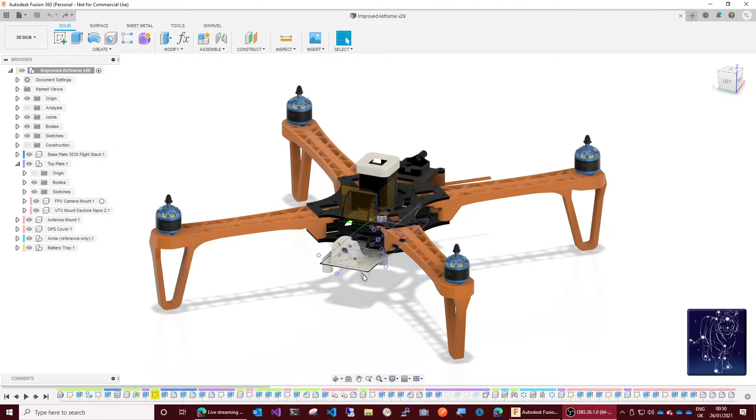I put out a video earlier today showing a test flight of the quadcopter, and one of the problems I had was that the battery tray, which is this part here in the drawing, let's zoom in here, and the bottom tray, this white part, is attached to the rest of the frame. Now you can see here there's no attachment.

That's because it uses little plasticky, spongy vibration dampening balls to sort of hang it, to suspend it in a way in which it's slightly springy. Those are made of a silicone rubber type of substance, and they go in these large holes, with a counter bore.

You just kind of squeeze them through and they hang on, and then there's a hole through the middle, and a plastic pin that goes through, called an anti-drop pin. The pin has a sort of barb on the end, and there's a little washer clip thing that goes over that and it's supposed to not come off. So the idea is that if your drone gets jostled, it can't pull the grommets out and drop the battery and anything attached to the battery tray.

Now, I found that to be not a very good design. I don't know if it's just the way I'm doing it, but I found that those pins let go all too easily, and I would rather at this point just put screws in, have the thing solidly mounted, and be confident it's not going to fall off in flight.

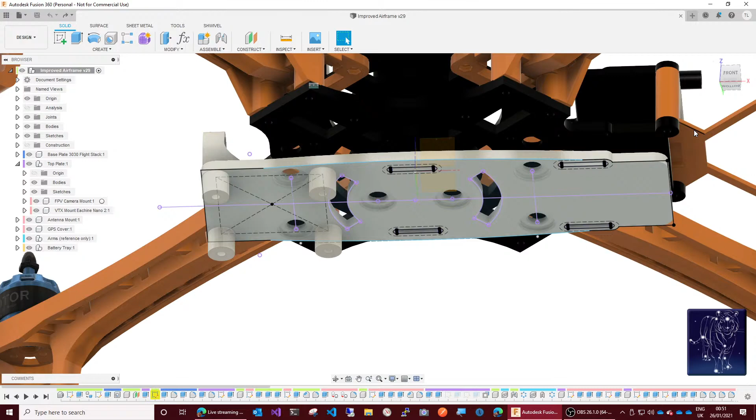So what I plan to do is develop some cylinders that fit in these recesses instead of the vibration dampening grommets, and join everything together rigidly. Okay, so how do we get started?

Now I'm only going to join the 4 corner holes. I'm not going to join these because these are directly underneath the flight controller electronics, bolts here in these 4 little holes. I don't want there to be any possibility of the drone landing heavily and pushing a screw right up through the flight controller and breaking the electronics, so that would be bad.

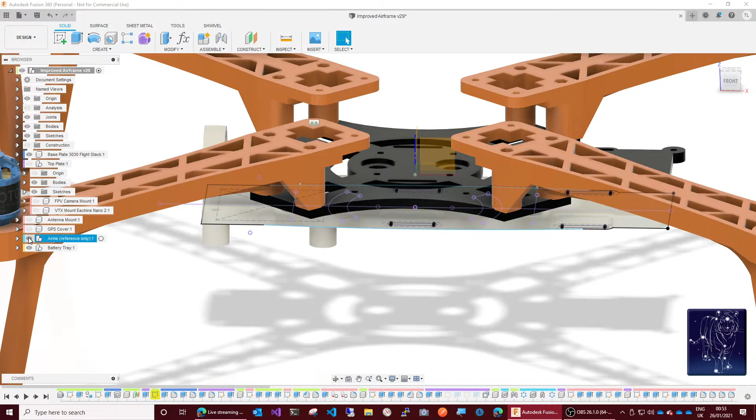So the primary footprint for this design is taken from the base plate here. I'm going to turn off the components I don't need - we don't need to see the top plate, we don't actually need to see the base plate really, but we'll come back to that. We don't need the camera mount, the VTX mount, the antenna mount, the GPS cover, the arms, or the battery tray for the time being.

So here is our base plate, and I actually want to disable the solid bodies there and just look at the sketch. Why am I not seeing the sketch? I think that's because that's up here. Yeah, footprint, there we go.

Okay, so this is the main sketch that drives all the dimensions, and one of the things we've got here is construction lines where these vibration dampening grommets go. So what I'm going to do - okay, so from this sketch, let's just turn the body back on, the top plate on.

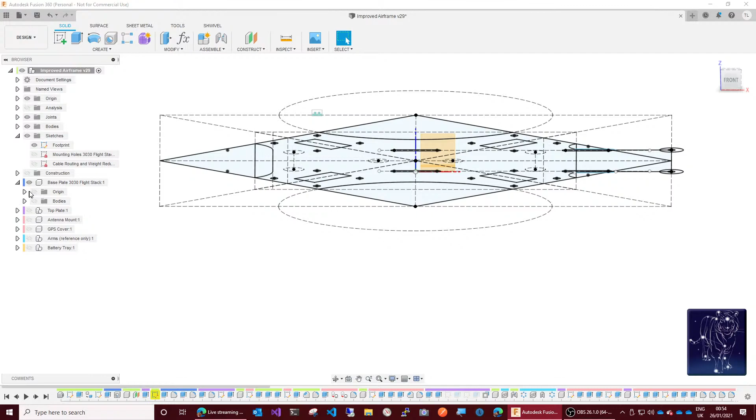Okay, now the sketch is on the, not the top plate, the base plate. Not the top plate, the base plate body's on. Okay, now as you can see, the sketch is on the top. I don't know if that's clear, but the sketch is on the top surface of the base plate. So let's turn the base plate off again.

There we go. So what we can actually do is just begin extruding from this sketch, I think. Okay, so let's try it and see what happens. It's Q for press pull. And... we can't.

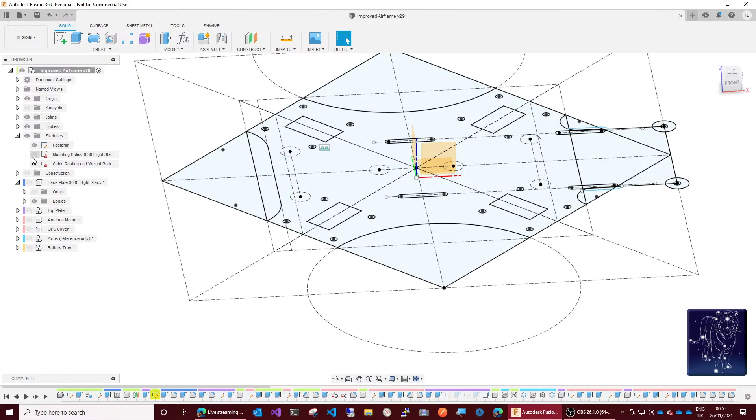Okay, let's stop this and let's go to the battery tray. And let's look at the... right, we are seeing the sketch for the battery tray. And that's on the base. All right.

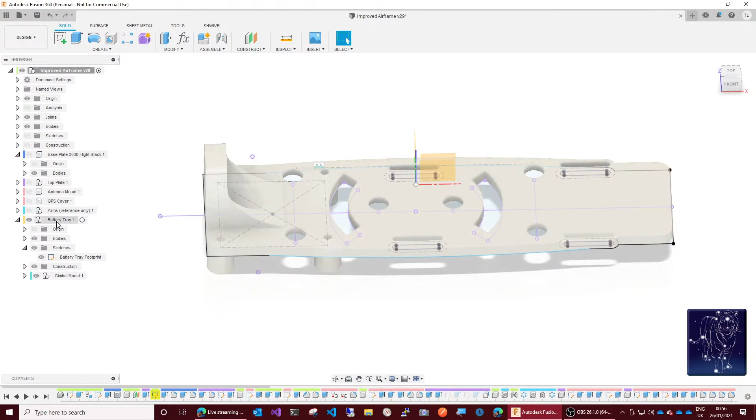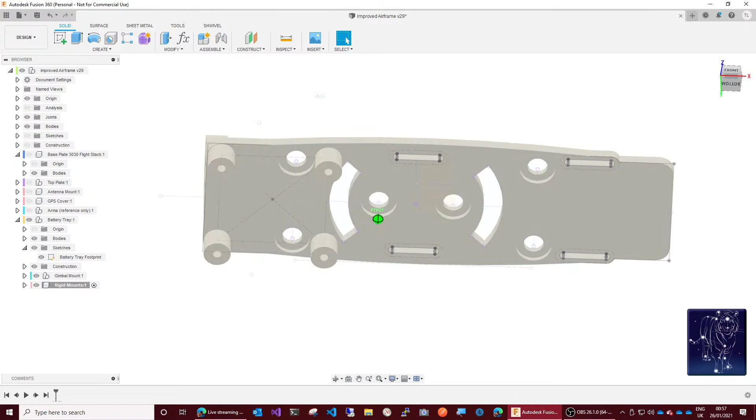Okay, so all right then. So let's actually create a new component underneath the battery tray. We've got - okay, new component. And we are going to call this rigid mounts. Okay, and then we can probably use the features that are already here.

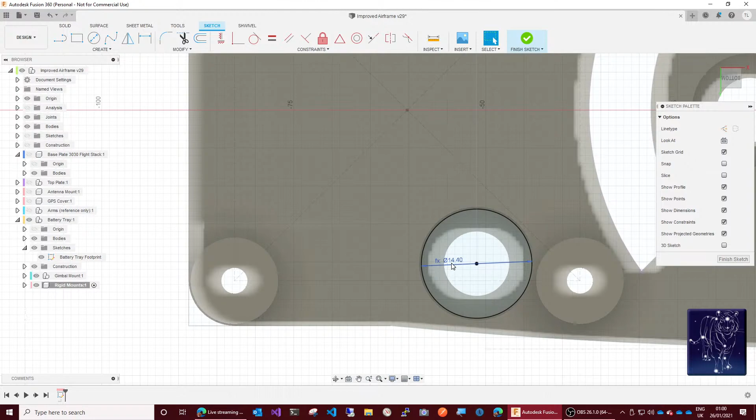Okay, and now you can see that this measurement here is now labelled fx, which means it's a function, and the value of the result of that function is 14.4 millimeters. And if we zoom in a bit, you can see that it's left a little gap here.

Okay, and then the inside part of that cylinder needs to pass up through this hole. So we'll do a similar trick there. We will, starting from the center point here, and we want the diameter of that to be the...

What did I just do? We want the grommet hole diameter minus gap size times 2.

Okay, and you can see that's offset that from the diameter a little bit. The diameter of the hole now is slightly greater than the diameter of the part we will print, which should mean there's enough clearance to push it through.

And then we want to put an M3 bolt through the middle. I'm actually going to do that a little bit later because I want to use a hole with a counter bore to do that. So we will first of all extrude.

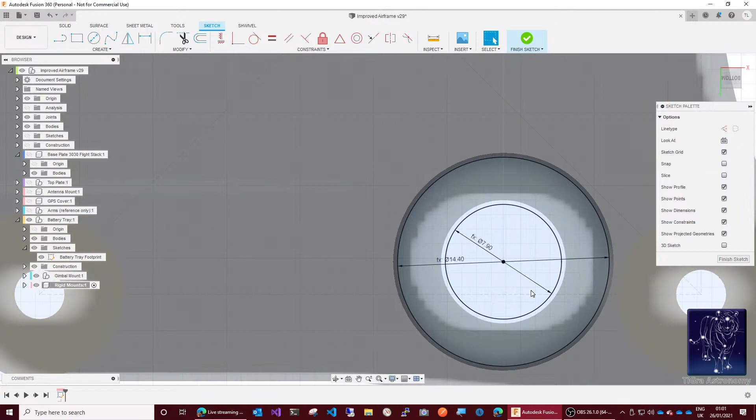Let's finish the sketch. Okay, I'm going to name the sketch. I like to name my sketches because otherwise you can't figure out what they do later. So this is going to be the rigid mount plan or footprint. Let's call it footprint.

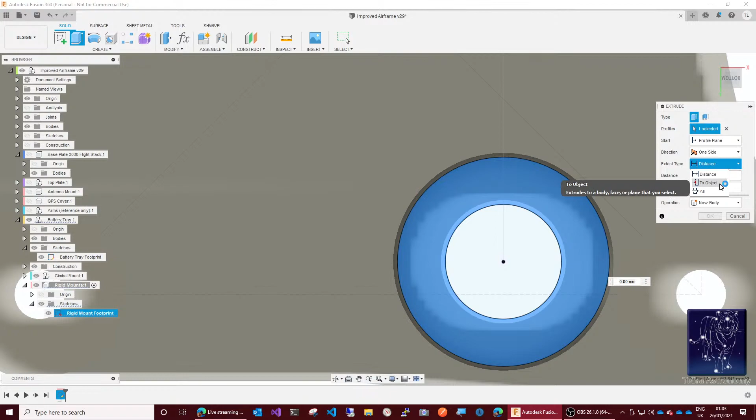Okay, and now I'm going to extrude that part of the sketch, and I'm going to extrude that by a distance of... actually I'm not going to extrude it. There's a parameter somewhere that sets that depth, but actually what we'll do is instead of extruding a distance, we'll extrude to an object, and then we can pick the bottom of that hole.

And that should, with a little bit of luck... yeah, to object 1 selected. And it's kind of difficult to see what's happening here. So let's turn off the battery tray solid body so we can see where we are.

And there we go, look. So we've got like a washer shape. So that's exactly what we wanted.

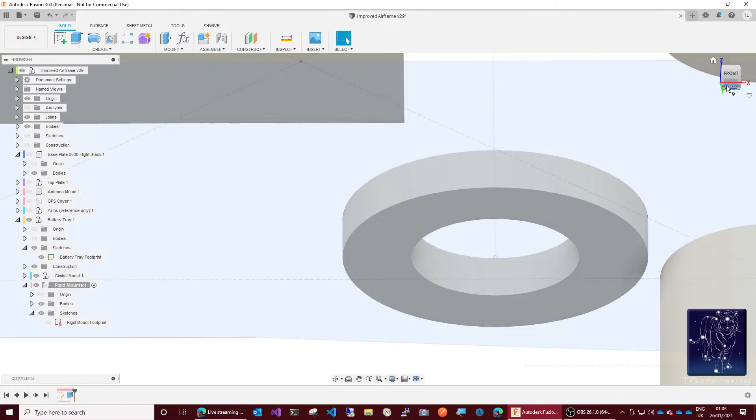And then let's go back onto the bottom. And now I want to extrude the center part of that. Where's the sketch gone? Fusion annoyingly turns the sketch off as soon as you extrude anything. So we want to extrude that by a distance...

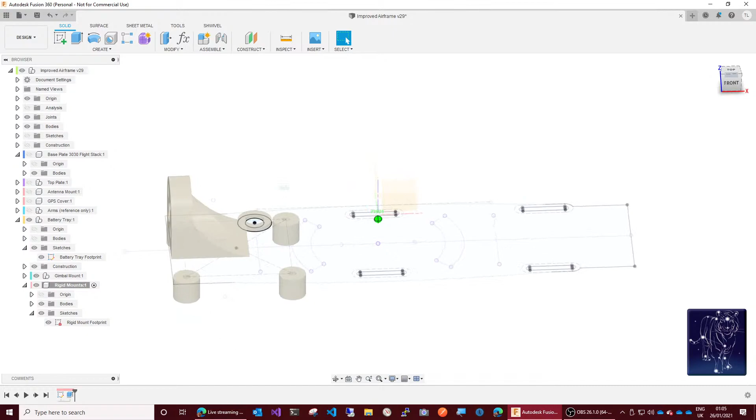All right, there is a... this sketch is on an offset plane, so let's look for the origin. There is a, up here, improved airframe.

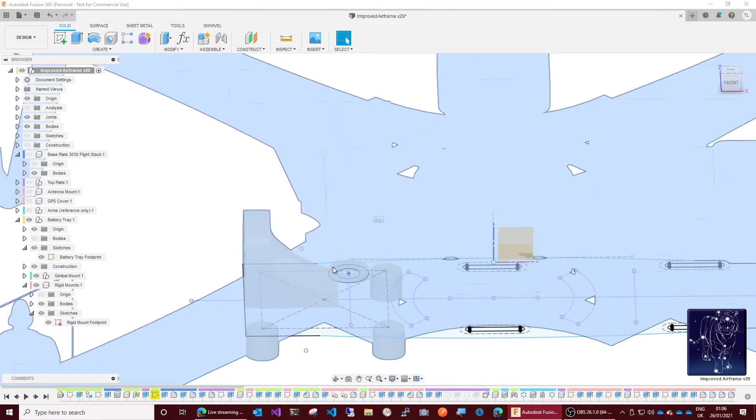Okay, now somewhere there is an offset plane that sets how far down that tray hangs below the main body, and I don't see it at the moment. There's an offset plane, but that's probably not it.

Maybe that's it. Oh, there we go. There we go. Alright, so that offset plane just uses 14.5 millimeter. Okay, so let's create a parameter for that. So we're going to create a new user parameter. We're going to say battery tray offset, and that will be 14.5 millimeters. Okay, and that is distance from base of base plate to top of battery tray. Okay.

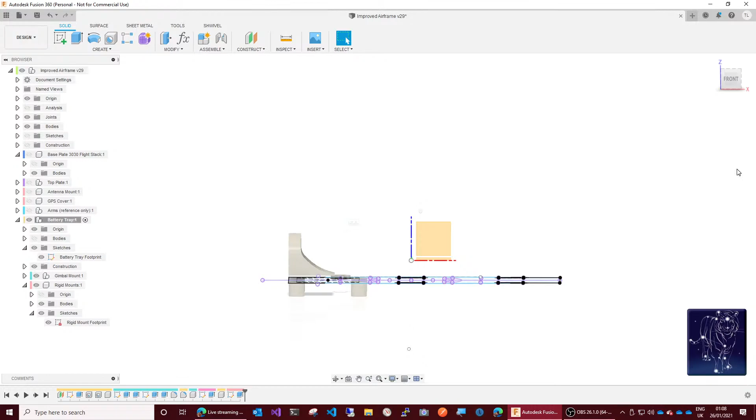to take my, okay, where are we? We want this thing, not that thing, this thing here. Okay, so we want to push pull that face there. So let's go ahead and select that, and we want that to be battery tray offset.

What? The object that you are... No, don't fade away, I'm trying to read you. The object you are creating is not visible. Okay, yeah, I know that. So that's because I've turned off the battery tray so I can see what I'm doing. There we go. So we want that to be the tray offset.

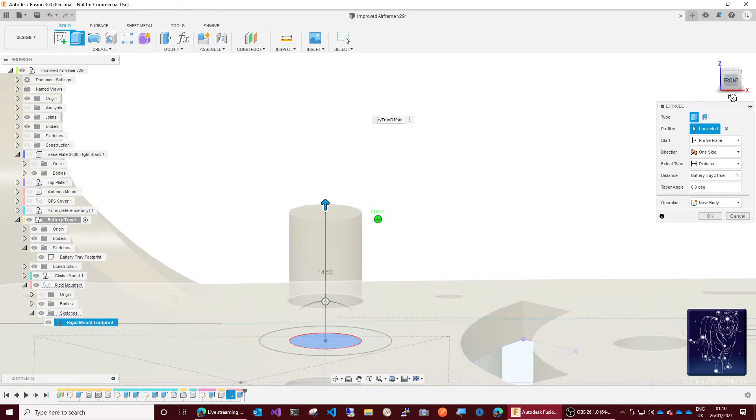Oh, that plane actually goes to the base of the battery tray, so that's an error in that comment I made. And then we want that to be battery tray offset plus the base plate thickness, because it has to go through the base plate, plus base plate thickness. Okay.

And for reasons that will become clear later, I'm only going to go halfway, so I'm going to divide that by 2. So we need to put brackets around that, because it does evaluate expressions in correct mathematical order. So we'll have to do that addition first and then divide the whole lot by 2. Okay, so only halfway. Right.

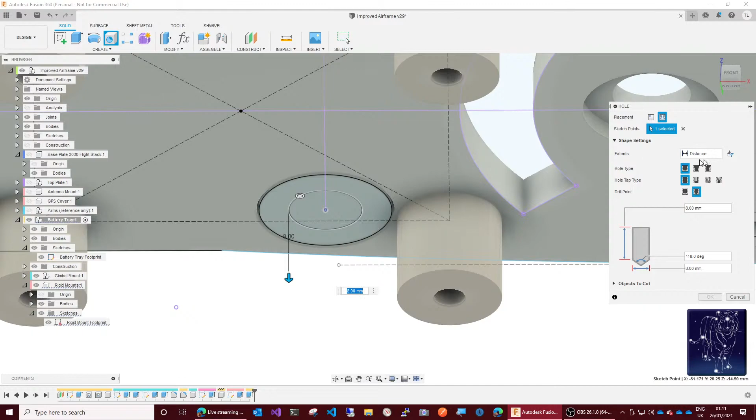And then we want a hole through that which is big enough to take an M3 screw or bolt or nut. Okay, so we're going to use the hole command, and we will put the hole there on the sketch point, and actually we want it to go to the top of that body there. Okay, and we want it to have a counterbore,

and we want the counterbore to be big enough to take a nylock nut. Okay, and I happen to have on my desk a box of nylock nuts, and I will take one out and measure it with calipers across the diagonal of the point so that I get the largest measurement, and that comes out to about 6.1,

oh, hold on, that's really difficult to measure with good accuracy. Yeah, it looks like that's about 6.1, so we'll call it 6.2. I'll tell you what, we'll call it 6.1 plus 2 times gap slide. Okay, so that counterbore needs to be 6.1 plus 2 times gap slide.

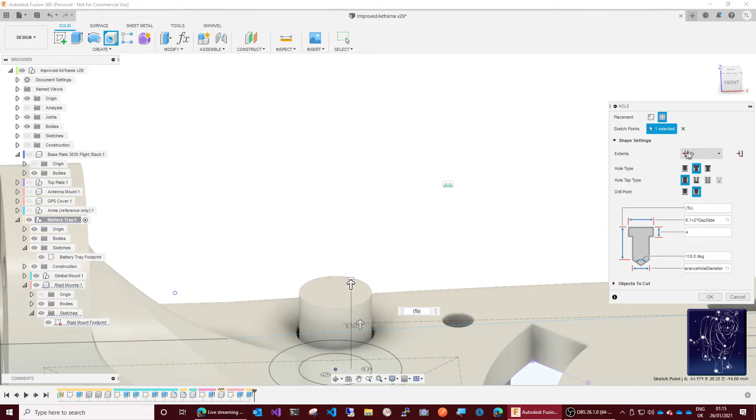and then the, now, oh, and the width is M3 clearance hole diameter. There we go. Now, why's that disappeared? To. Let's say all. Okay, there we go. That's what we want.

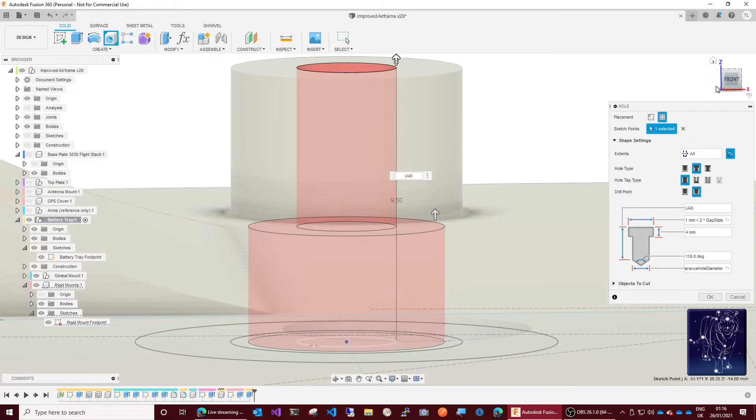Okay, so we want our hole to be counterbored, big enough to take a nylock nut, and then only thing is I'm worried that's going to be near as big as the cylinder itself. Is that going to leave us? Okay, let's make it and then measure it and see what we get. So we'll say okay. And yeah, there's really not much meat there, is there? There is not much meat left there.

Okay, what we'll do is we'll change the design to only allow enough space for the head of an M3 bolt and not the nylock nut. Let's see how big that needs to be. It's M3 bolt here. And that is 5.32. 5.33, 5.

That's not very round. 5.32, 5.4, 5.32. It's 5.32. That's fairly consistent. Okay, 5.32. So let's edit that feature. So instead of being 6.1, that's going to be 5.32.

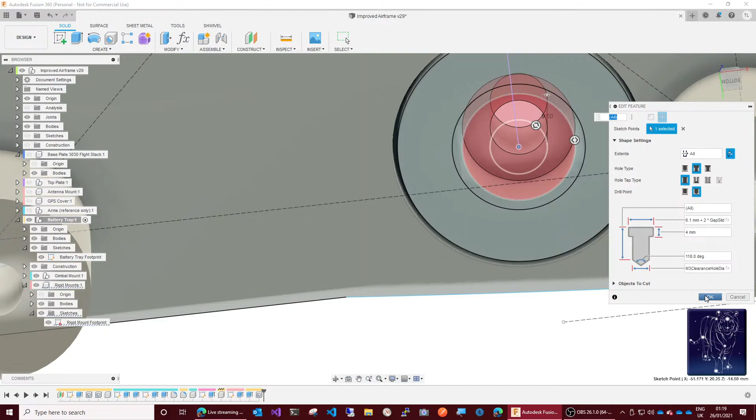Oh, no target body found. Now what have we done? Edit feature. Oh, it's back. There's something a bit screwy about this whole command in Fusion 360. It sometimes loses track of the body you're trying to cut, I've noticed. So I just literally edited it and said OK without changing anything, and now it's worked. Huh.

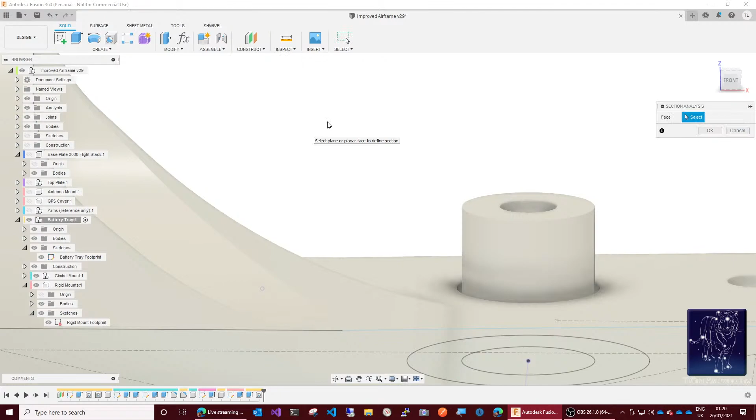So yeah, right. So let's just do a section analysis on that, because I want to see what shape we've got in there. So section analysis on this face here. Oh no, that's not what I wanted. Cancel. Section analysis on this face here, and then we can. That's still not what I wanted.

Okay, perhaps what I need to do is do a section analysis on this face here. No, that's still not what I wanted. Okay, I want to cut a slice through it so I can see the inside shape. Okay, inspect, section analysis. Okay, let's do it on this front face. That's pretty unambiguous. There we go. And then we can slide that in till it's halfway through that shape.

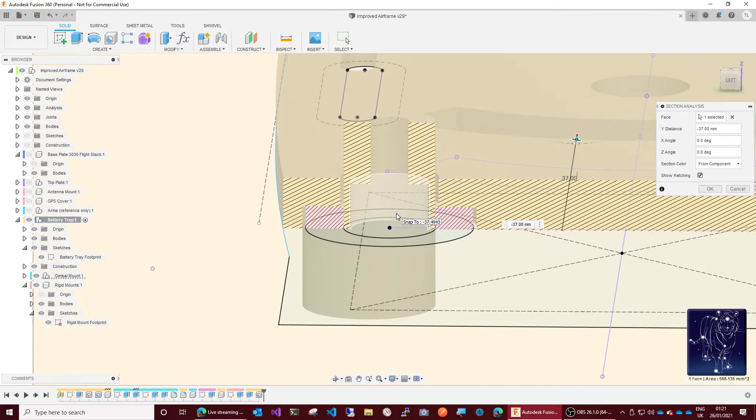And ooh, you can see there now how very little material there is there, which is a bit of a concern, really. That is a bit of a concern. Is that... yeah, that's as good as it gets too. I was trying to avoid having to reprint the bottom plate and the battery tray, if reasonably possible. But this here is quite potentially weak.

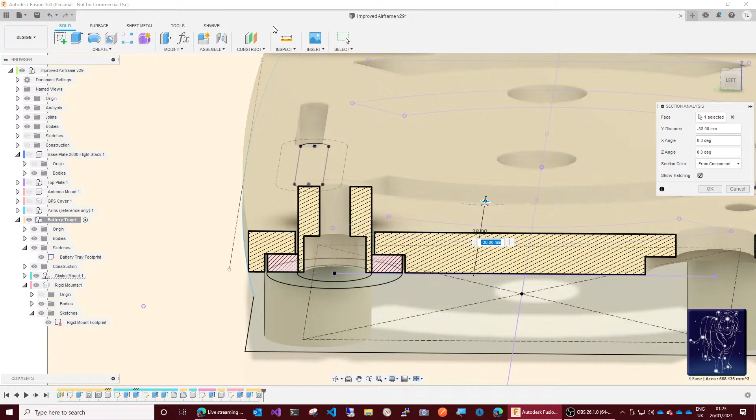I didn't really want to have the bolt sitting proud, because the battery's got to sit there and they'll sort of foul on the battery. What else could we do? Reduce the clearance here, which I don't think is a great idea. Right, what are we looking at? Oh.

Maybe I'll have to use M2 screws. Let's have a look and see if I've got any. I do have M2 screws, but they're tiny, tiny. And I don't think I have any long enough. So let me measure.

Okay, I have the battery tray, the actual physical battery tray that I made earlier in my hand, and I'm looking at whether the battery would fit between the screws, and the conclusion I'm coming to is no, it doesn't. So I do actually need to recess these screws. I don't think I can live with that.

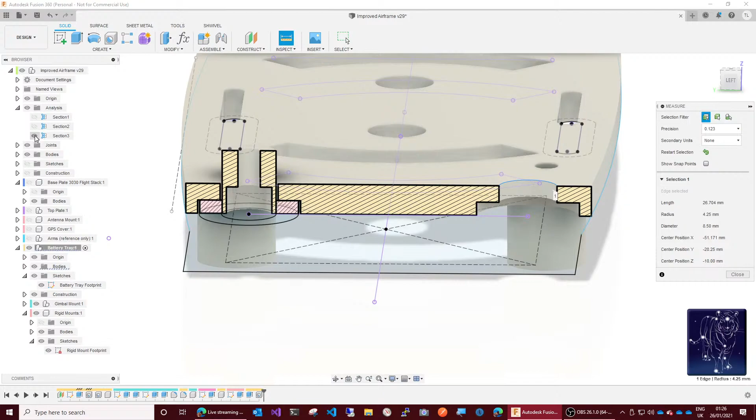So let's have a look at our parameters here, and there's a grommet. I thought there was a grommet hole diameter. Okay, so that's 8.5. So let's make that 9.5. Wait for it to recalculate. Now what? Cable routing and weight reduction. Now I've got an extrusion problem. Oh, fillet problem. Okay, no worries, we'll fix that.

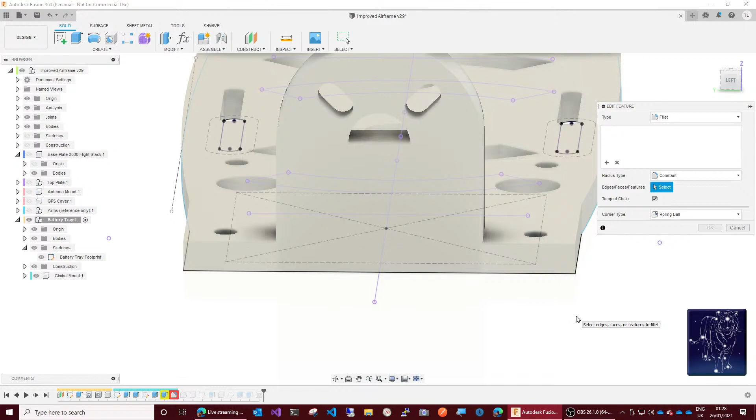So let's turn off that section analysis, and let's edit this. Where are we? I see. Okay. All right. So this has ruined the... I don't know why. It's ruined that fillet because the extrude hasn't happened.

Okay, let's undo that and change parameters. Doing 3D modelling is getting a bit like coding, where you get bugs and you have to debug them. And well, that's alright, because I'm a programmer. So I can do that.

So we want to turn that analysis off. What's going on? Okay, we want to turn that analysis off. There we go. Now that's the shape that it should be. Now that must mean that that is picking up on some part of that hole geometry somehow. So let's have a look at that. It was the battery tray.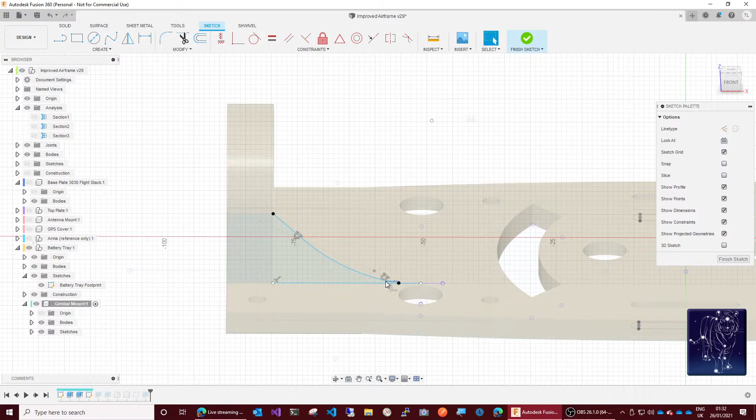did that not work? We will unproject... what? Stop it. Okay, so we will. Right, we've got a coincidence constraint there we want to get rid of. Let's get rid of the solid body of the battery tray. Okay, so we want to get rid of that coincidence constraint. And then I can move that point. I can move that point, he says.

Right, that should probably be coincident. That should probably be coincident with that. Ooh, oy vey. That can go away because we don't want that. Okay, and then that should move. Ooh. Alright.

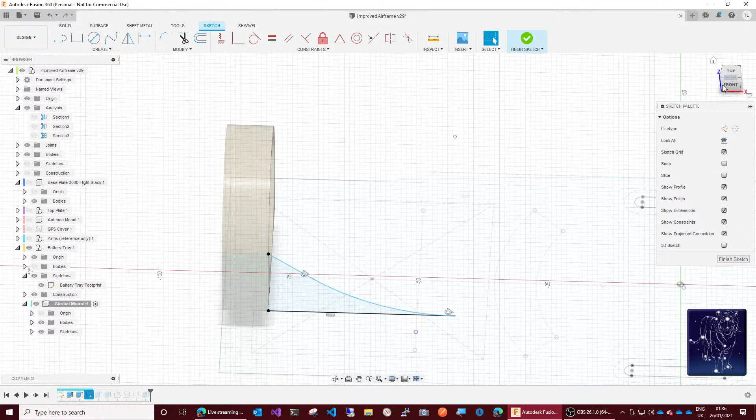Okay, good. And so we look at that from the front, so we can now say that that point there should be coincident with that point. No, that didn't work. Right, what we do then is we draw a construction line. Construction line from that point straight up.

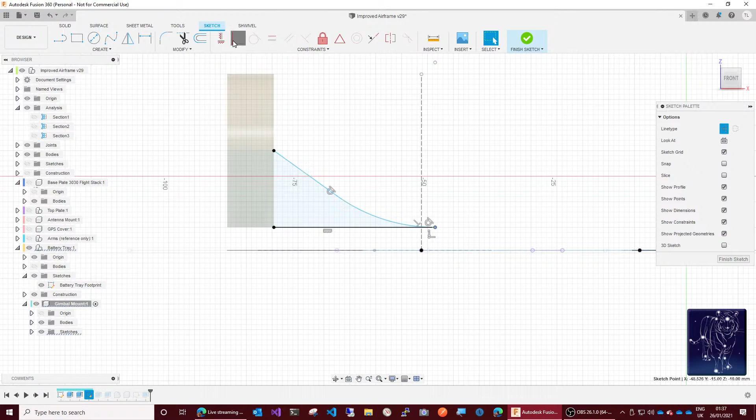Okay, now that's automatically added a perpendicular constraint there, which is good. And so now what we want to do is make that point there coincident with that line. There we go. And now we have fixed that sketch problem. So we can finish the sketch.

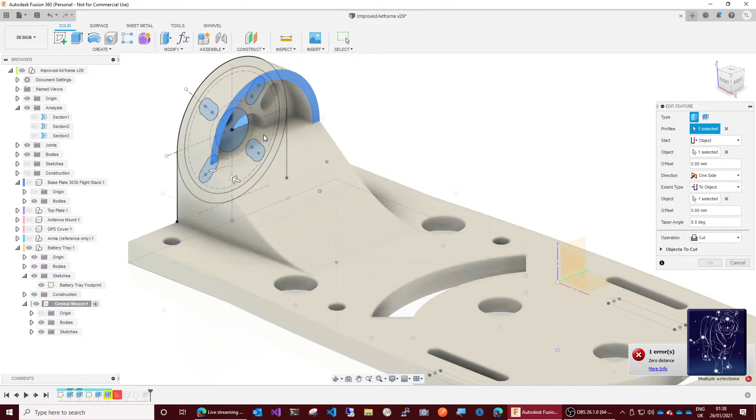Okay, and then that extrude, edit feature, right, extrudes that shape across there like that. There we go. And then that extrude, I don't know why that's lost its feature, but that extrude is supposed to pull that circle. Yeah, that circle. Let's just reselect that.

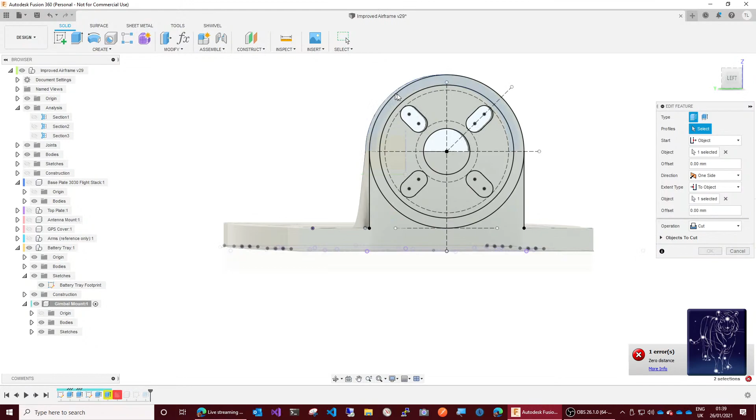Profiles. Come on. Let's try it from this side. Yeah, there you go. That circle, solid disc, and that guy. Okay, it's meant to pull that from that face there. Hello. Did I get the right extrude? That's what it's meant to do, is cut that shape out of there.

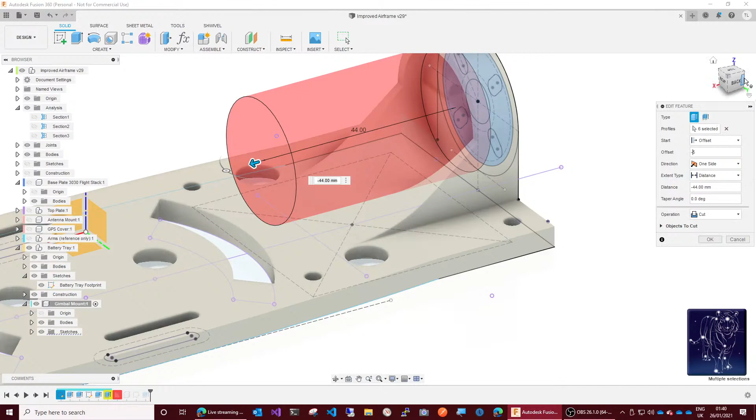But let's go with offset. No. Okay, I'm just trying to see if the... Alright, I'm going to cancel this because I can't see what's going on. Right, now. Okay, so what I was looking for is that this face should have been extruded a few millimeters, and it has been.

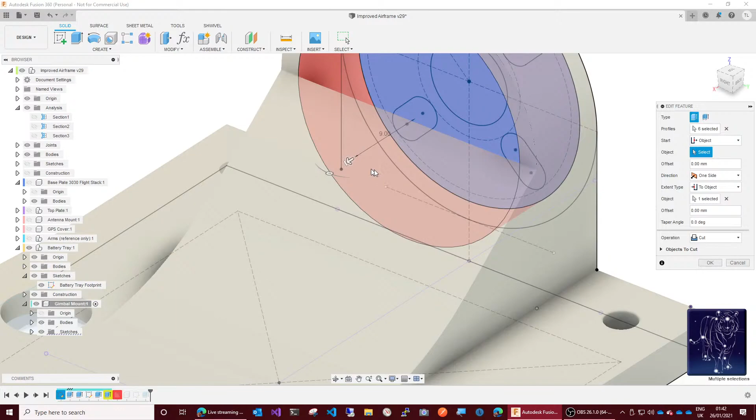It just looks like the starting point's wrong. So that extrude there has worked. And then this extrude here hasn't. Or it sort of has. So edit feature. And it should have started from... Can't get to the object. Alright, so it's supposed to... let's pull from there. There we go.

Right, so it starts from that object. Have I not selected it? I thought I had. All right. So let's start it from object. That's it. And then it goes to another object, and the object is that point there. There we go. And it should have included...

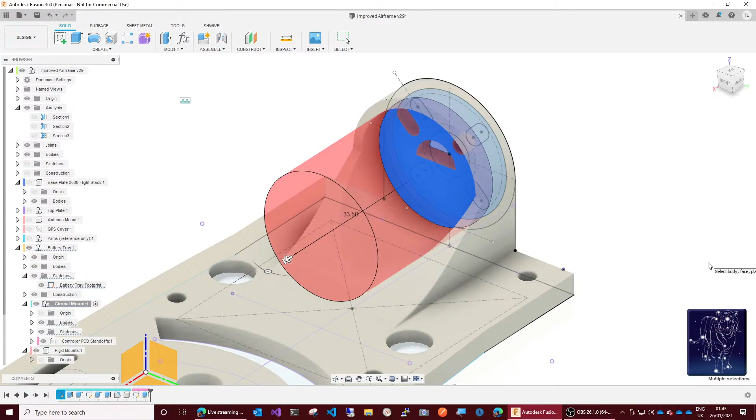Oh, yeah, we're cutting. So, okay. Why haven't I got... Ooh, unhappy face. Oh dear. Alright, so that extrude needs fixing as well. Okay, not a problem. That's all correct. But it shouldn't include those. All right, let's roll back the timeline because there's some weird problem here.

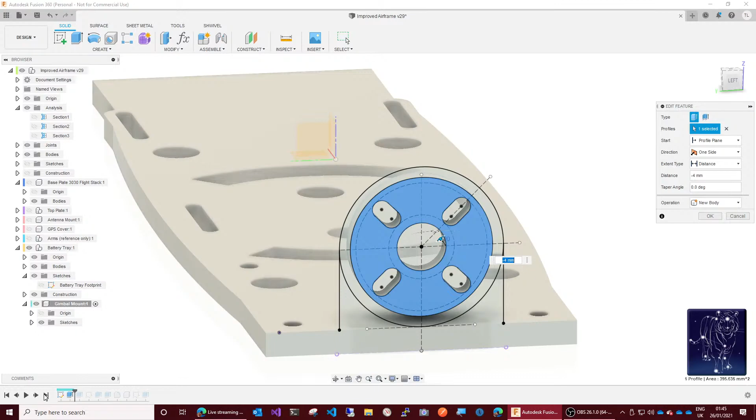All right, now we were missing one slot. One of the nice things in Fusion 360 is you've got this timeline. You can just roll time back, and so we've fixed that extrude, and then we can go forward in time and see what this extrude does, and that extrudes the shell of that feature. That's all good. And then we have another sketch, and then we extrude that shape there.

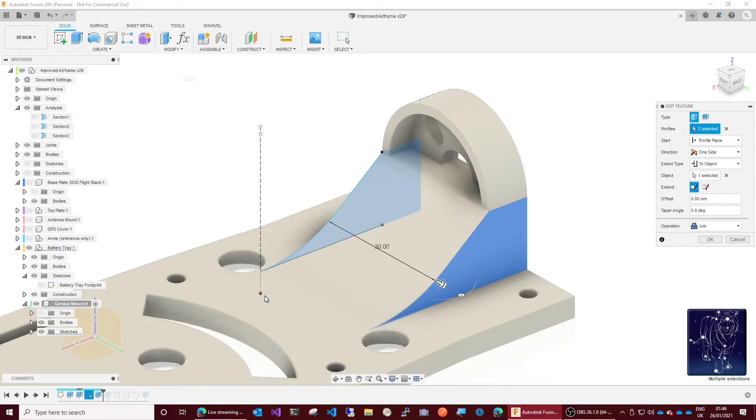Okay, I see what the problem is. In extruding that shape, we have blocked up those bottom holes, and that shouldn't have happened. So it's this extrude here that needs fixing. It's supposed to start from... it's the sketch that's wrong. The sketch is not supposed to go all the way to the back. So that extrude should not have extruded that part. There we go. That's our problem.

And then if we roll the timeline forward, there we go. Perfect. And then put the fillet in. The fillet no longer has an error. Okay. Oh, now that's interesting. Oh no, that's correct. All right. So, where were we? We're trying to get our rigid connectors going, weren't we?

So, in order to do that, where have they gone? See, that component's disappeared now, and I think that's because I rolled the timeline back to a point before it existed. So let's just... There we go. Okay. Oh good, that's all working, that's good. And...

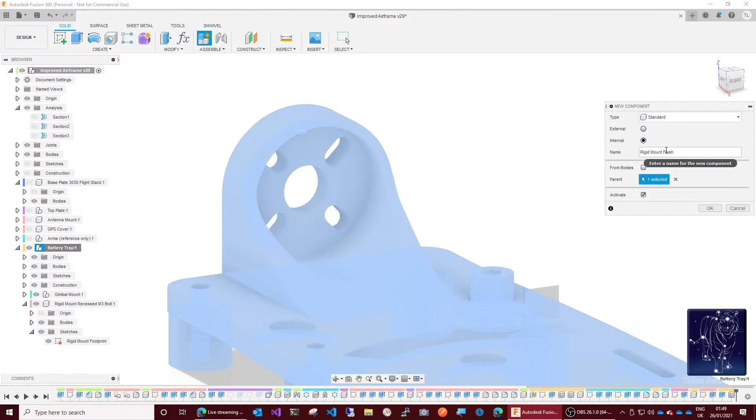And that's going to be rigid, what did I call it? Rigid mount flush. Okay, now to get the rigid mount flush, we would like to, can I extrude off that? Push pull. No, because it's a different component, so I need to.

I wonder if I can move that up to the parent component. Let's try it. Error. Yeah, it doesn't like me doing that. It's refused to allow me to do that. Okay, no worries. Will it extrude down from... Okay, so...

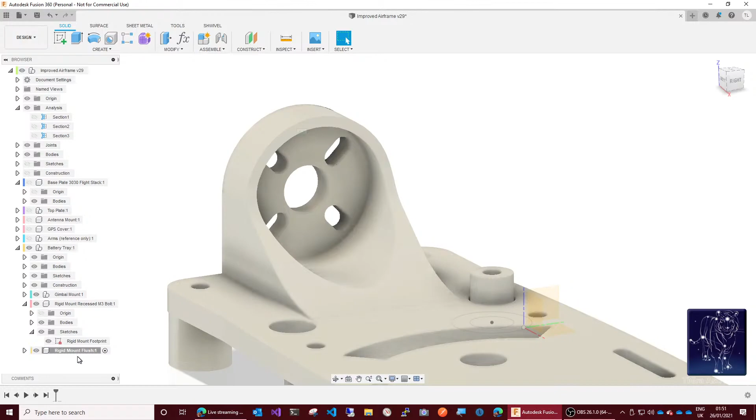It's a damn shame, really. Come on. Let me move that sketch up there. Warning. Detect some position feature may result downstream features fail after restructure. Obviously a student of English. May fail after restructure. I would have done this differently if I'd known when I started. Alright, let's just start another sketch on top of that guy there.

We will, I think we can pick up those features, so we'll just start with the exact same features. Can we do that? No, apparently not. Hang on. I think I just made a construction line, didn't I? I'm not sure whether I actually just made those lines or... Let's undo that. Not happy.

In Fusion 360 you're supposed to constrain your sketches, so when I draw a circle from that centre point out to there and click OK, you can see that circle's in blue, which means it's not constrained. So in order to get that constrained, I need to actually fix the diameter.

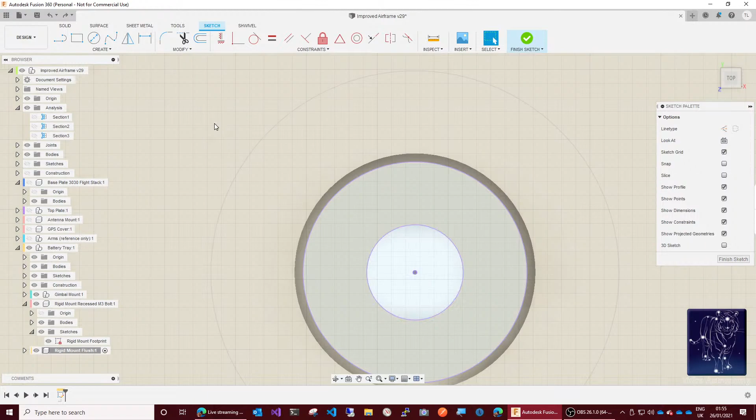Okay. Grr. All right. So it was... I'll work this out in a minute. It will be great. Right, center diameter circle. Circle from there to there. Okay, so it was grommet hole diameter. Grommet hole diameter minus gap slide.

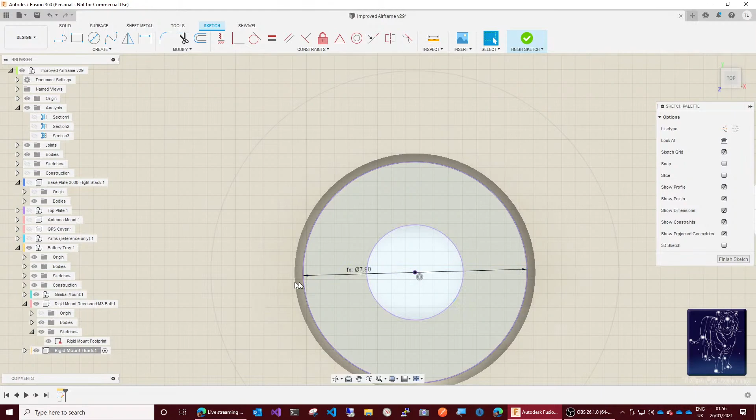I can't remember what we did. Gap slide times 2, I think. Doesn't look right. Hole diameter minus gap slide times 2. That's better. And then now you can see, hopefully, that line is, it's hard to see, but it is constrained. Oh, I hope it's constrained. We've got a concentric constraint there, and we've got a fixed diameter, so it should be constrained.

And so we can do another one. And that was grommet hole diameter. Grommet hole diameter. Minus gap slide. Not grommet. I am not making a very good job of this.

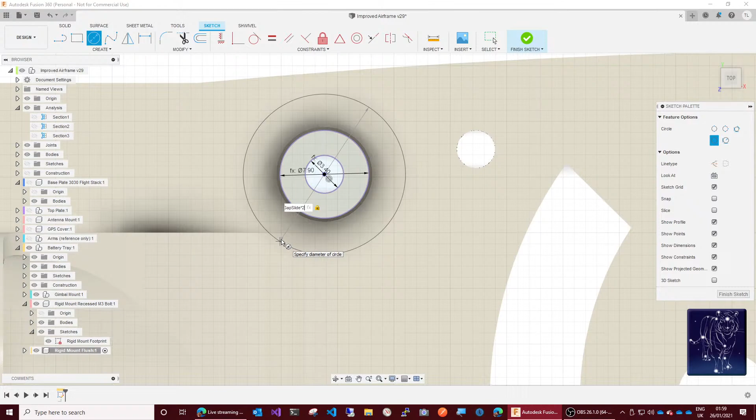And then we want a third one, third circle, which is this big guy here, which is the grommet flange diameter minus... There's plenty to play with here, so we can say gap slider times 2. Okay. And then we can start extruding, and we can say finish sketch, and okay, we want to extrude that

by battery tray offset plus bottom base plate thickness, yeah, base plate thickness, that's it. All divided by 2. Okay. That looks good. And then we need to, and let's turn the sketch off, which I didn't want it to do.

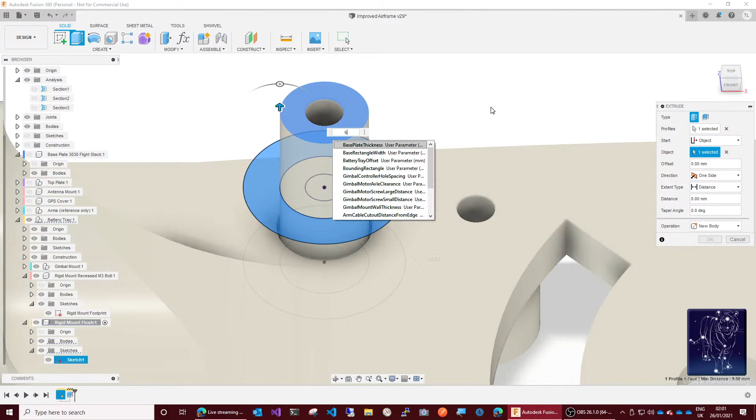So turn it back on, and then we need to extrude that section there. Not from the profile plane though, but from an object, which is the top of that. And I can't remember how deep it needs to be, but let's call it base plate thickness over 2. And in the other direction, like that. There we go. Alright.

Now the reason I've made this in 2 halves is because it has to be assembled, so it has to come in from the top of the base plate and the bottom of the battery plate and meet in the middle, and then everything gets screwed together. And if I made it in one piece, I wouldn't be able to pass it through, so that's why it's in 2 pieces like that. And something seems to be, oh no, that's it. Okay, so that is the peg.

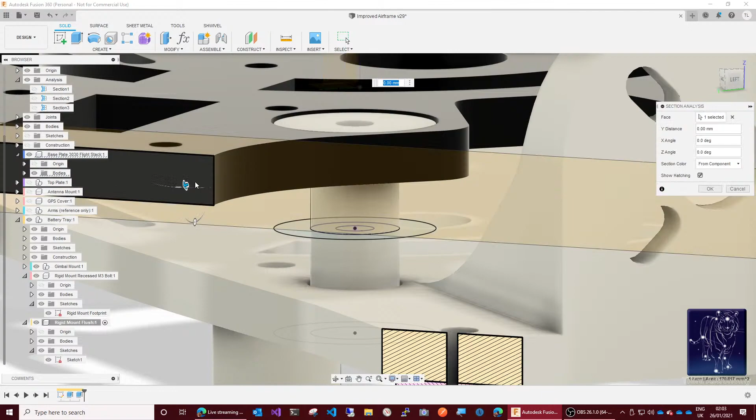Okay, so now if I turn on the base plate, okay, that should sit flush. It's not quite, is it? Let's have a section analysis there. Let's inspect section analysis on that face, and we'll push that back. It's all right though. It's all right.

I just hope I get away with this thickness here. It's awfully thin, but it might just be enough.

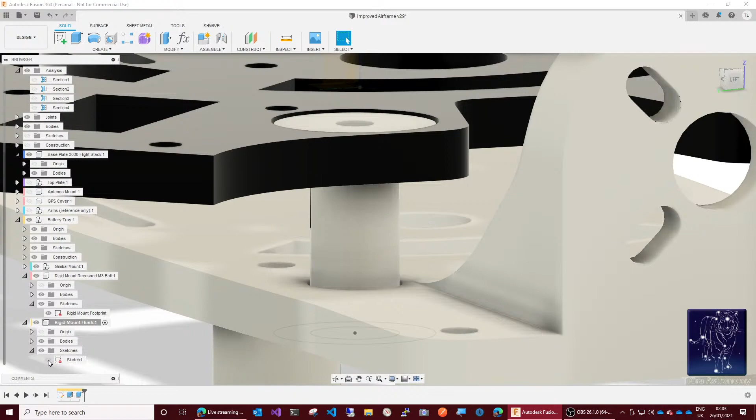So that is basically my design finished, I think. So we can turn that sketch off again. And that I think... okay, let's...

Should probably make a rectangular pattern of those. Let's go up to the battery tray component, and we will start with nothing selected, and we will make a... let's look at the top. Those are, yeah. I don't need to. I'm not going to do it for now. I'm just going to leave the one component there. It looks a bit odd in the model, but you know, what are you going to do?

We've got another sketch turned on there. Battery tray. Recessed M3. Turn the sketch off. There we go. Alright, so I'm going to save that.

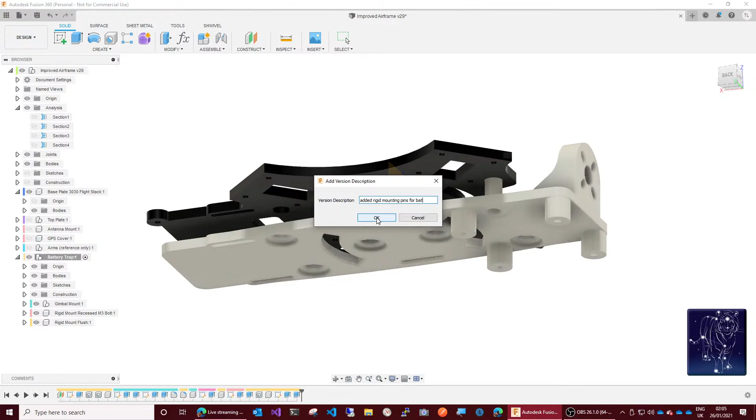Okay, so what did I do? Added rigid mounting pins for battery tray. Okay,

And now I am going to take those two components, so that one and that one, and I'm going to save those as STL files. Oh, it looks like I have to do it separately. Alright.

So, save as STL. High poly. Did that ask me? Idiot. Save as STL. Okay, selection.

Yeah, it's only going to let me do one at a time. Alright, no worries.

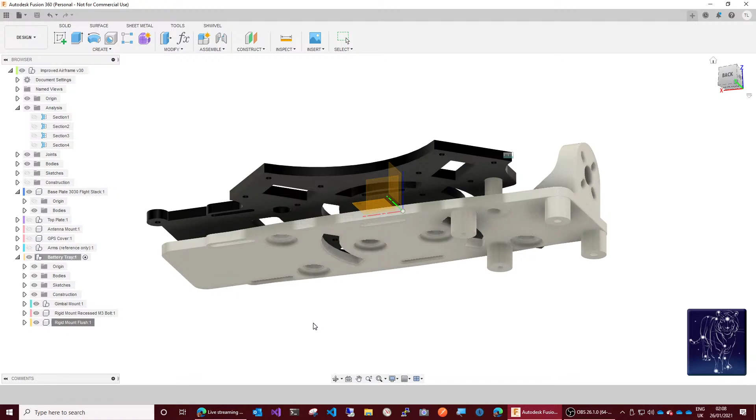If this works out and the pins fit and they're strong enough and everything, then I'll go back into the model and make another 3 copies and put them in the other position so the model looks balanced. But it's not worth doing it until I know they're going to work.

Alright, so we will now bring that in to Prusa Slicer. Crossfire 2, TPL Designs. Okay, rigid mount flush and rigid mount recessed M3 bolt. Open.

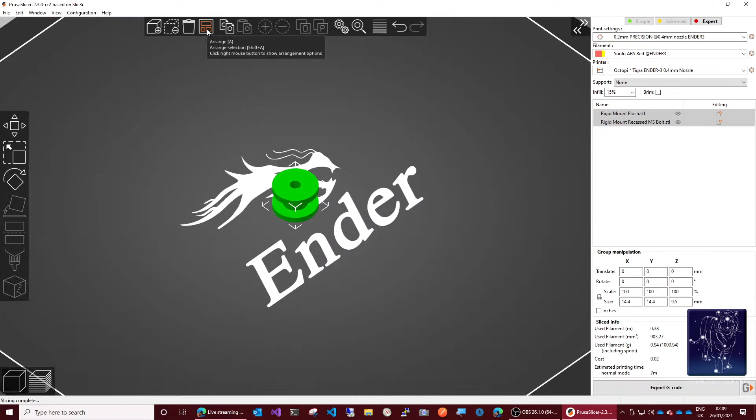And there they are, both overlapping on the build plate. So it's just, we didn't get all of that one. That's interesting. We made a washer. Well done us.

Okay, so I was a bit quick to quit out of Fusion 360 there, so I'll load that again. While we're waiting, this obviously needs to print the other way up, so we can ask the slicer to put a surface down onto the build plate and then click the one we want. So there's that done.

And this one, probably best as it is. Let's say save project. And we can say, let's see if it's in the Prusa folder, rigid mount pins, rigid mount pins, save.

Okay, and that's designed, that's set up to print at 0.2mm layer height with a 0.4mm nozzle on an Ender 3 printer, using Sunlu ABS red filament, and it knows about Octoprint, so we can send that out to our print server.

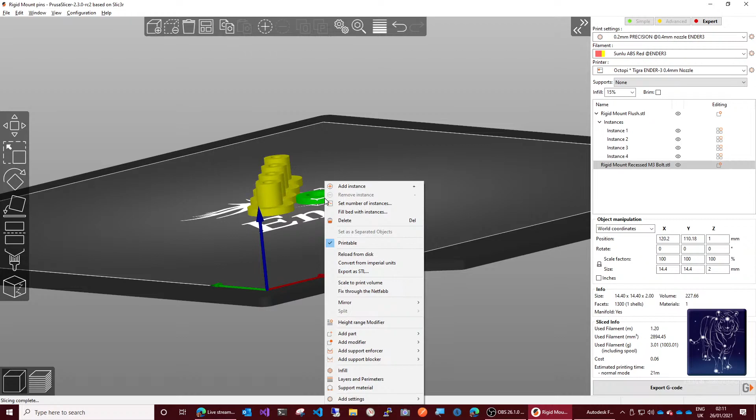And we'll be needing 4 sets, so we can... right, so we can say we need 4 of those and 4 of those. There we go, line them up. It's a funny way to do it, Prusa Slicer, but there you go, whatever.

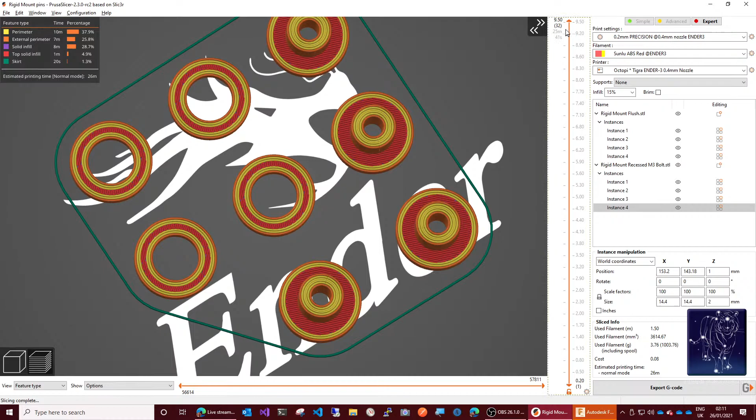And just while I'm waiting for Fusion to finish loading, we can look at the sliced output. Now these are obviously wrong at the moment, but we'll reload those in a minute. But estimated print time 26 minutes for the set. And we can slice down through these and see.

3D printing, no, FPV multi-rotor, there we go, it's improved airframe. That guy there. And battery tray. That guy there

didn't export in its entirety for some reason. Save as STL. Okay. Overwrite the STL that we made before. Yes, replace it. And then in Prusa Slicer, we should be able to go

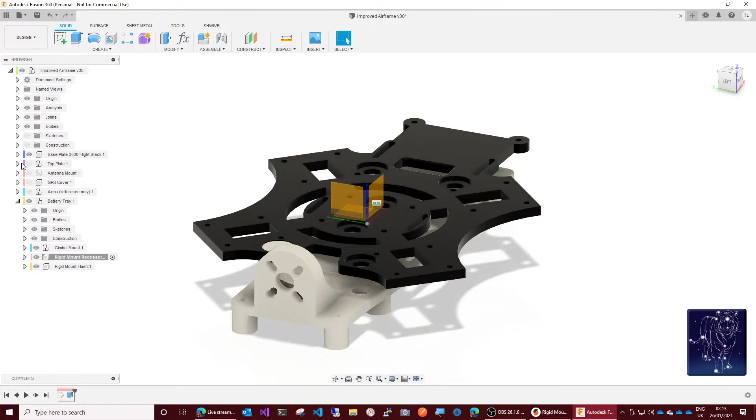reload from disk. And it's come out exactly the same. So what's going on there then? Okay. We need to turn off some things we're not interested in. The battery tray body, and try and figure out... oh now that's interesting.

Well, I'm a bit confounded by that, because I definitely remember putting a recessed hole in that. And it's not in the timeline anymore. So that's all a bit weird. Alright.

Let's re-extrude it then. That's totally weird because that one's built on the top of it, and that's just weird. Let's just, before we get too carried away there.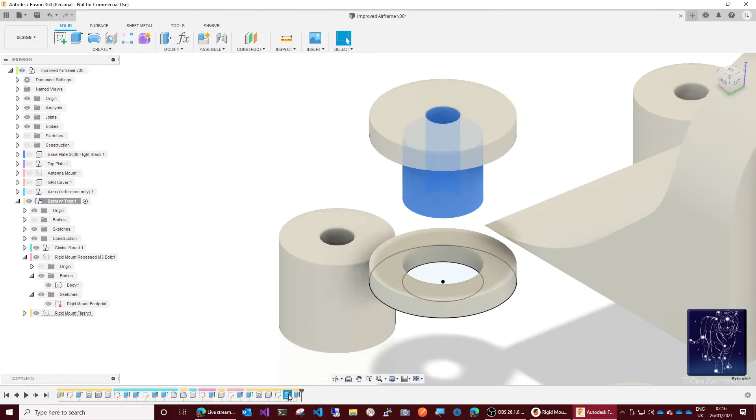There's the hole. There's the extrude that's meant to be. Let's edit that feature.

Profiles, one selected. Yeah, that one, that's it. That profile. Yeah, not that one, but definitely that one. Okay, and then the distance is not 2 millimeters, that's the thing. It's not 2 millimeters, it's battery tray offset.

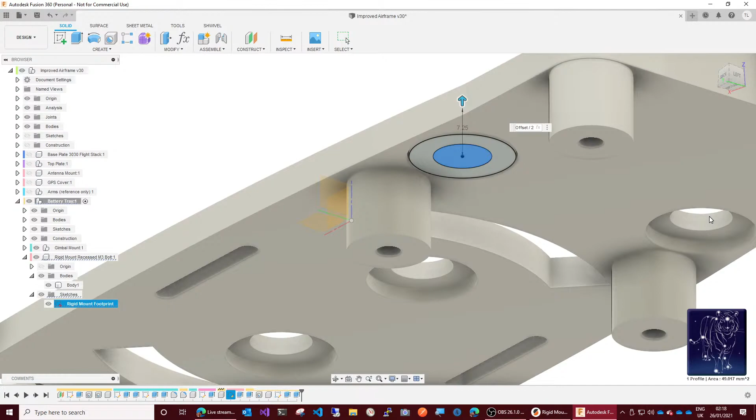Over 2. Warning. Object you're creating is not visible, and that's because... there we go. He's back. And the hole's there. Alright, I think we might have recovered that.

So let's save that. We repaired rigid mount flush, and so we want recessed M3 bolt. This guy here we want to save as STL.

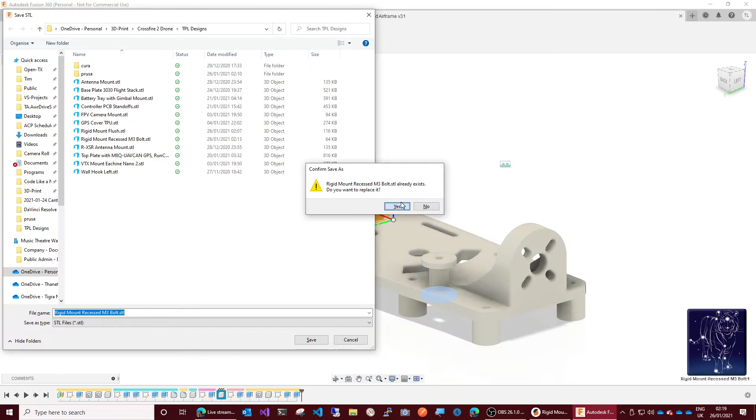Save as STL. And yep, high poly and everything. Save and overwrite. And then in Prusa Slicer, reload from disk. Reload from disk, where is it? There it is.

Come on, don't tell me it's... It's not that I don't believe you anything, but I don't believe you. Reload from disk. It's... Actually, it's this thing I want to reload from disk, isn't it? I don't get it.

It's still a washer. What's going on? Right, let's hide that one. It's definitely not a washer, dude. Has that got into the wrong component? Ah, yes, now you see what I've done here, I think.

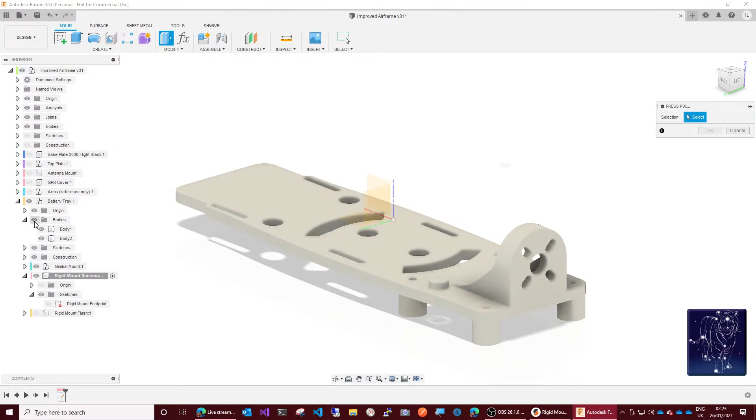So, in this component, I need to extrude battery tray... goodness.

Okay, we want to turn off the gimbal mount. Where's that? There it is. Right. We want the sketch on. Okay, we want to extrude that.

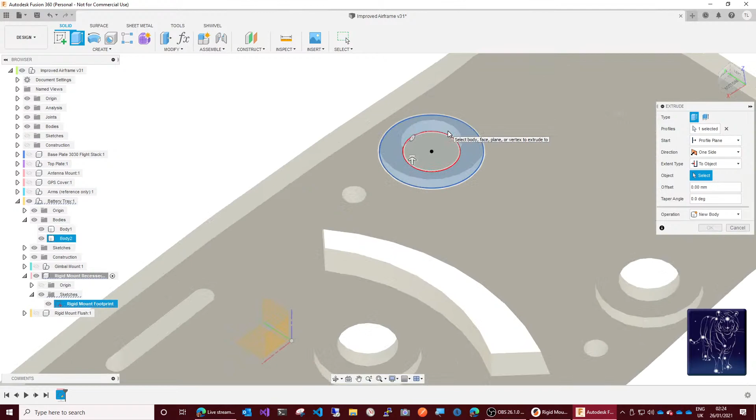To object. Oh, see now. We want to extrude that to there. Don't believe that worked. Okay, unselect and...

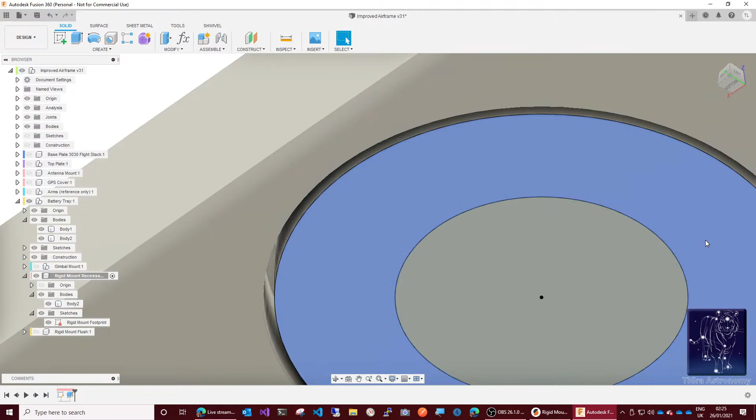To object. Right, so we want to go up to. Sometimes it can be difficult to see the thing you want to get to, but it's that face there. There we go. Okay, new body.

Now then, and then this guy we need to extrude, distance battery tray offset over 2. Alright, hopefully that should, yeah, okay.

And I think we need to add the base plate thickness in there. So the distance is battery tray offset. So it's battery tray offset plus base plate thickness, close bracket, all over 2.

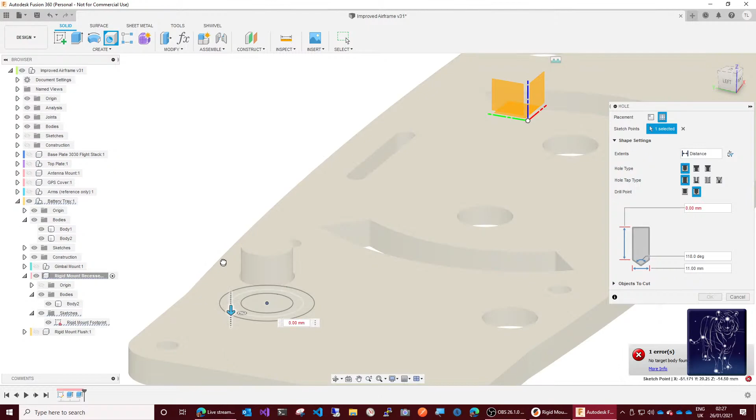Okay, and then we need to put a hole. We need to put a hole from that sketch point going up this way. Okay, reverse direction. That's it.

And that hole needs to go to, well, let's just say all. And it needs to be counterbore. And I can't remember any of these measurements, of course. So it was...

Okay, let's get the calipers out again. Okay, the diameter of an M3 bolt head is 5.32. That was it, 5.32. So 5.32 plus gap slide.

And this diameter here is M3 clearance hole diameter. I think it needs to be... alright, so now we...

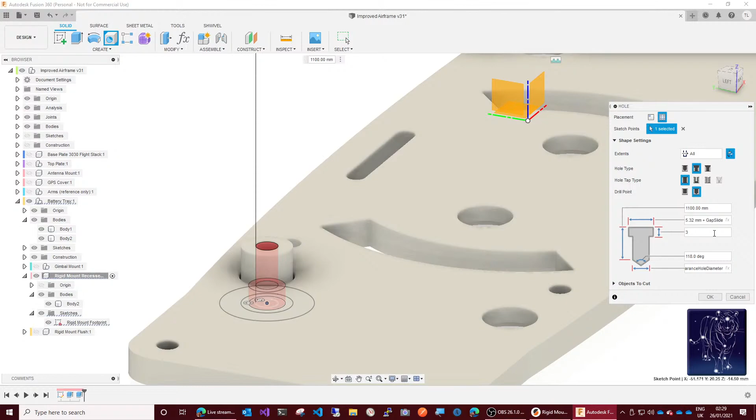And go. And we should be able to turn off the sketch again. Oh, I've lost my mouse. Where's it gone? There it is. We should be able to turn off the sketch, and then under there we should have our part with a hole in it, and we do.

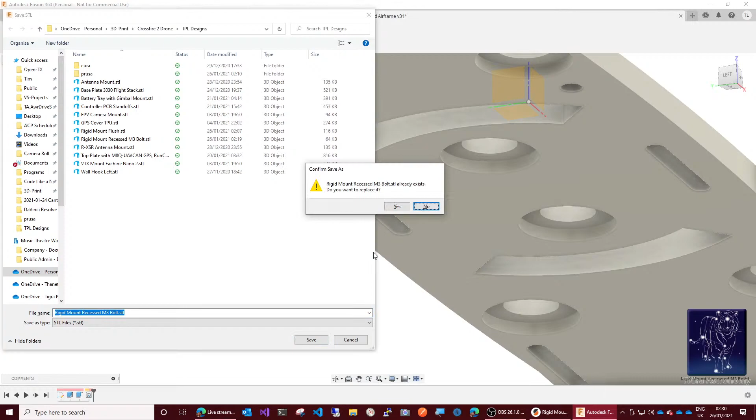So if we now take that, save as STL, high poly count, save and overwrite, and we'll save that.

Let's park Fusion, and we should be able to reload from disk. Yay! Okay, good. And if we preview that, we should be able to figure out okay. Alright, I think we'll get away with that.

Alright, so what I'm looking at is the number of perimeters here that we've got to play with when we slice the object, and as you can see, we start from the build plate, and we have the large hole here, which is the recessed M3 bolt head, and then that suddenly reduces there to the M3 clearance hole, and then we start to build up.

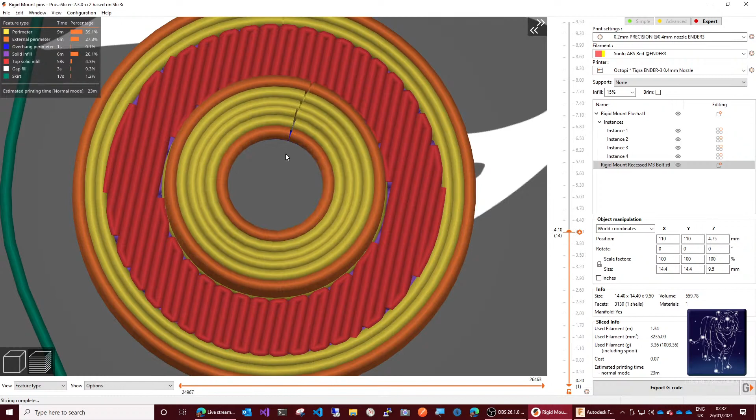That's actually more decent than I thought. We've always got at least 3 perimeters there. That shouldn't be a problem. Doesn't seem to be very tall though.

That was the critical point there. I was worried about strength, but three perimeters should be strong enough.

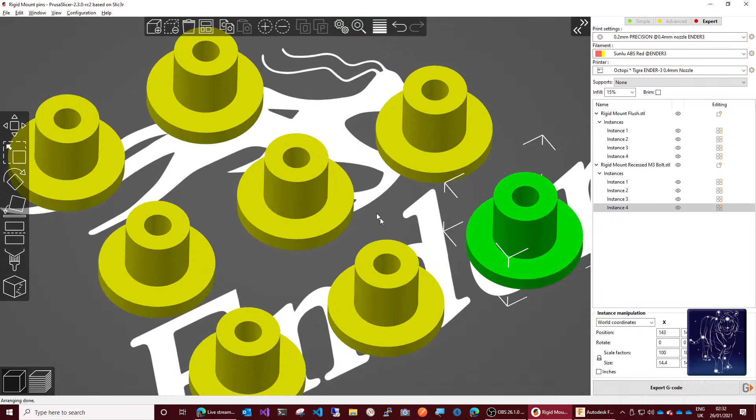So we want a total of 4 of those. So set number of instances to 4, and tidy up. And there we go. Those are our pins.